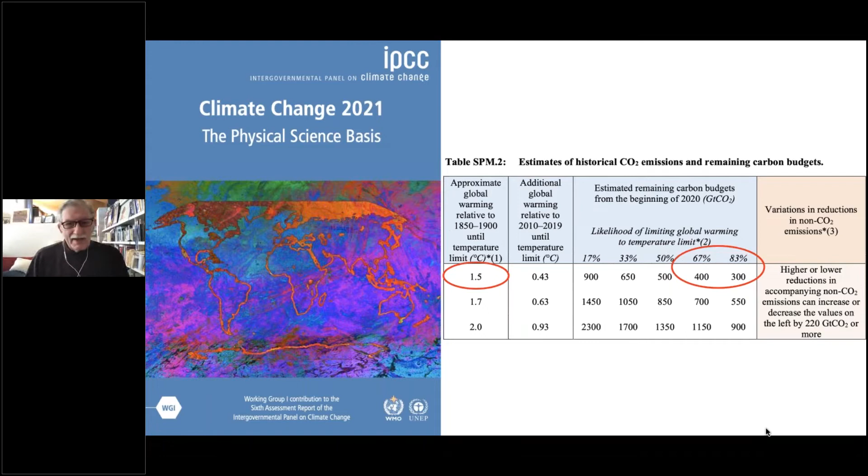So what does that mean? Well, roughly globally, we emit about 40 gigatons of CO2 a year. We hear everybody talking about they're going to phase out by 2050.

If we draw a straight line down from there, we'll do fairly well this year, but next year emissions are supposed to come back up. That's 600 gigatons. That's over the 300 to 400 gigatons, and that's less than a 50% chance of staying at the 1.5.

So what do we need to do? Well, we hear the scientific community telling us that we need a 50% reduction by the year 2030. And if we follow that line down, and actually do that, we will phase out CO2 emissions by the year 2050. That's 400 gigatons, which gives us a good probability of meeting the 1.5.

And for the building sector and the built environment, we can do better than that. We'd like to see a 65% reduction by 2030 and then zero out all CO2 emissions by the year 2040. This is the way we normally see how emissions are divided up.

Building operations, 27%, then you have industry, transportation. But what's new is that we now know that building construction and materials is responsible for another 10%, and infrastructure, all the site work and streets and roads and bridges, when we look at the built environment, is another 10%. So the built environment is responsible for close to 50% of all CO2 greenhouse gas emissions. So we have a huge role to play.

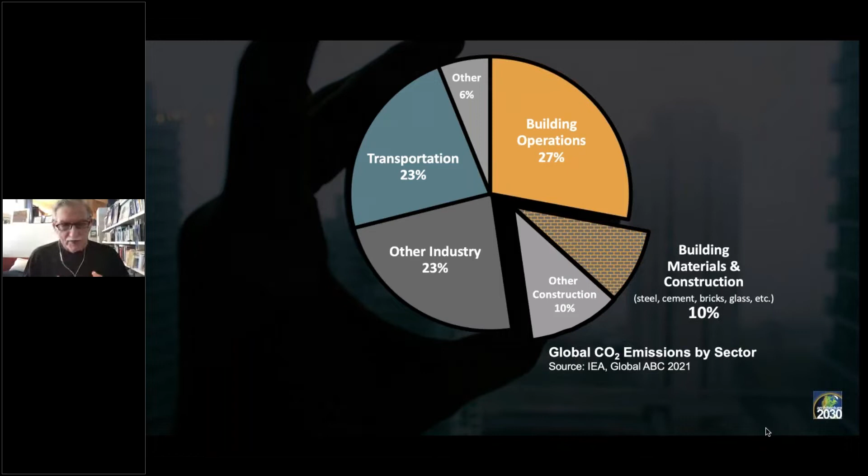So how did we go from late 1800s, pre-industrial times, through the Industrial Revolution to today? How did cities change, and how did we get all these modern skyscrapers, all glass buildings? The first modern building is the Bauhaus in Germany, built in 1925. Here you can see structure moves inside the building, columns and beams, rather than masonry walls in very short spans, so you could open up the floor plan. You could hang the exterior wall, it didn't have to be masonry, and get lots of glass and open up buildings. Considered the first modern building.

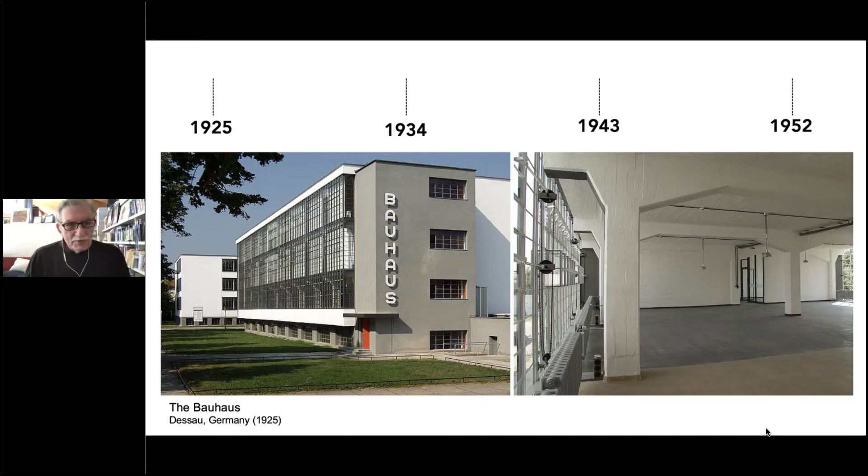So what was going on in 1925? Well, things were pretty primitive. We didn't even have TV then. We had the first Model T truck. We couldn't make transatlantic calls until 1927, the first one. So things were pretty primitive back when we had the first modern building.

In 1928, the leading architects, planners and designers in the world got together and held the first International Congress of Modern Architecture, to lay out new guiding principles, because at that time cities were really polluted. We were burning coal, housing was in with industry, and people were dying at a very early age. And so they laid out these beautiful modern principles: function-based zones, get the housing out of the industrial areas into high-rise housing blocks, into parks, solar exposure. Le Corbusier laid out the tenets of modern architecture: column wall separation, free the design of the facade, open floor plans, lots of glass. So that started in 1928, essentially a utopian movement.

It came to the United States in 1932. We called it the international style because we could import it and place these buildings anywhere, because energy was cheap and we could climate control any building. By '39, you see the beautiful Johnson Wax building, big open floor space. By '49, you had the glass house by Philip Johnson, a single glass house in a freezing, cold climate in New Canaan, Connecticut. We could overcome any exterior environment with fossil fuels and inexpensive energy. By '52, you had the beautiful single glass Lever House, and we had high-rise buildings. By '56, we had entire cities based on the modern principles.

So how long did that take? From the Bauhaus to the Lever House took 27 years. And we did all that with these tools, pretty primitive tools: T-square, triangle. We had to dip a pen into an inkwell. We didn't even get the first ink pen till 1960, and the first laptop till 1991. So we changed the world in 27 years with primitive tools.

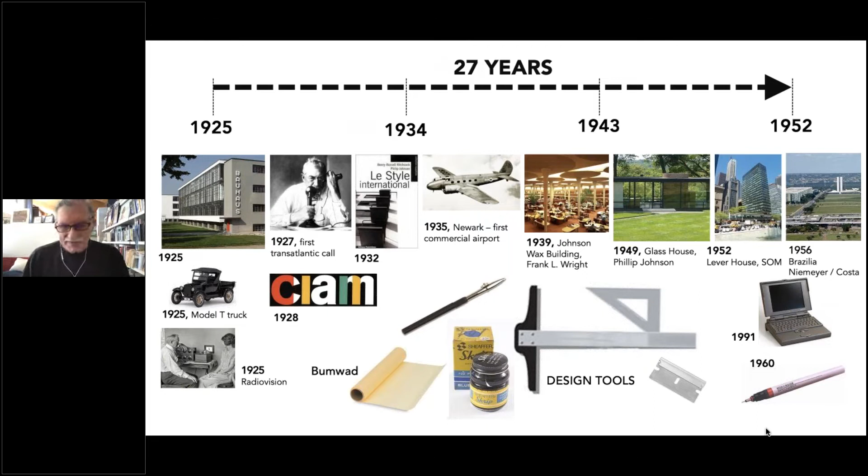It took years to do a set of construction documents to get something built. We now have 20 years to meet the 1.5 degrees C target, and we need very, very quick reductions between now and 2030. So at COP26, we're asking everyone and all countries to commit to a 50 to 65% reduction by 2030, which will put us on track for zero by 2040.

And this has been signed and pledges made by all the major architecture, planning, landscape architecture and engineering organizations in the world, representing over 1 million design professionals and 60 of the major international largest firms in the world, responsible for over 300 billion in annual construction, also calling for the 50 to 65% and pledging to help countries meet these targets.

So what are the planning and guiding principles we need to set out to do this? Design all new buildings, developments and major renovations zero carbon: efficient building operations, electrify them, and bring in renewables for the electrification. Use low embodied carbon and carbon sequestering bio-based materials and landscapes, and then densify, repurpose, reuse, or renovate existing buildings and neighborhoods. Rather than tear them down, the greenest building is the one we save and renovate, because we don't have to redo all that structure.

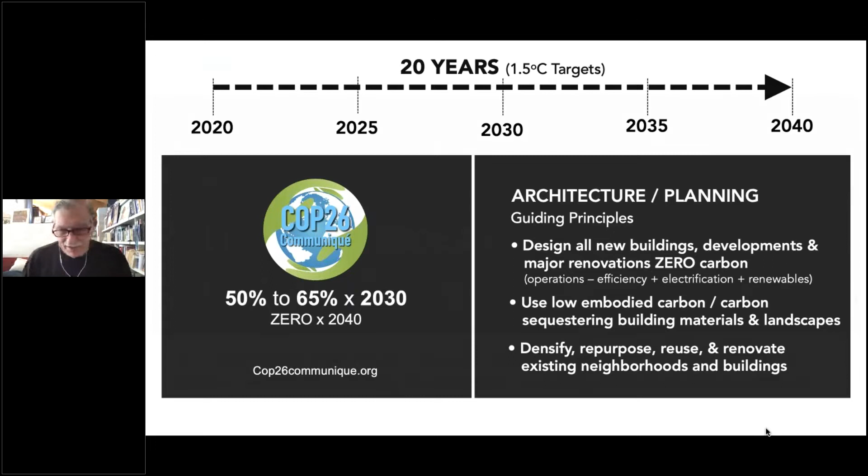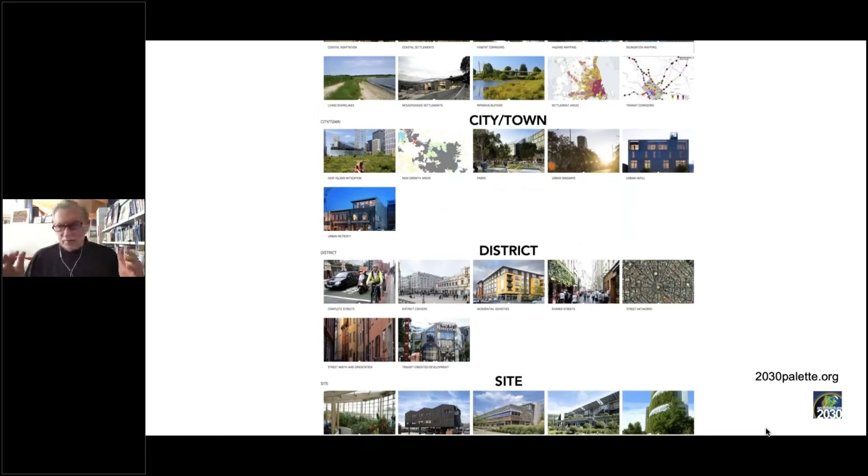Solar is now the cheapest electricity in history. We have the tools to do it, incredible tools now. And all the principles are laid out in the 2030 Palette. You can get it at 2030palette.org, everything from regions, cities, towns, districts, what to do. These are all the recommendations for how to design zero carbon buildings.

And how are we doing?

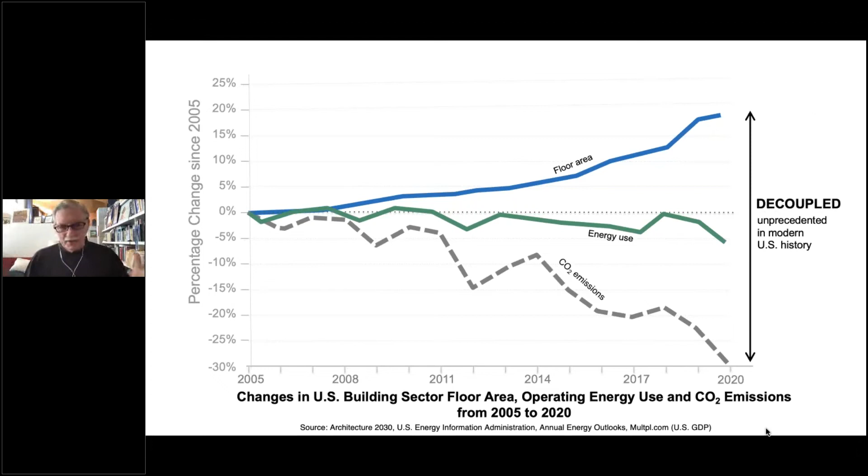In the United States, something very interesting happened in 2005. Floor area increased - it's been increasing since the Industrial Revolution. Energy consumption and emissions always increase when you keep building and building floor area, but something happened in 2005. All of a sudden, energy consumption in the entire US building sector did not increase. It actually went down 5.2%. And look at the drop in emissions, went down 30% between 2005 and 2020. This decoupling of emissions from floor area, even though we built over 50 billion square feet, is unprecedented in US history. So it shows we can reduce emissions and also build.

So what we're projecting is right now we're at a 30% reduction. If we make good on a zero grid by 2035, which our administration wants to do, we should be at 72% below 2005 levels by 2030 and easily phase out emissions by 2040.

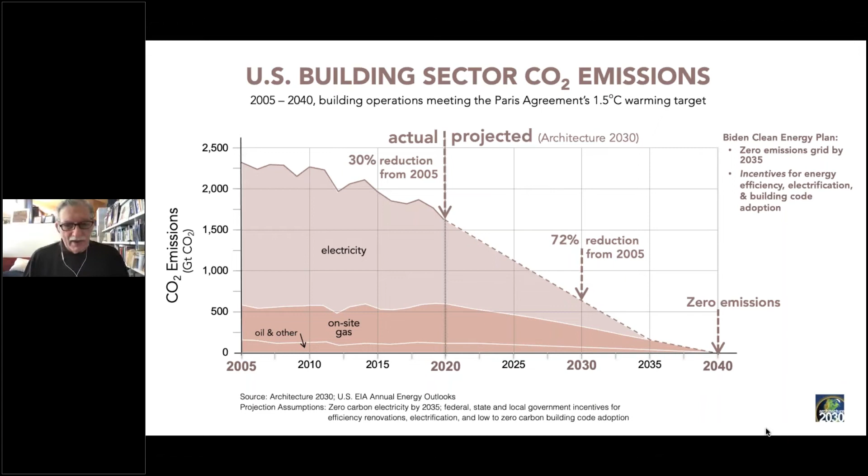So how are we doing globally? Well, worldwide, we're building. We went up 22% since 2010, huge amount of building worldwide, and we're going to keep on building. Those are the projections, but we have to build right.

So what's happening with energy use? Well, energy use didn't go up as much. It's really interesting, we're starting to see a little decoupling. It flattened out in 2018, and because of COVID, it went down slightly, 1% in 2019 to 2020. So we're starting to see that, but look what's happened to CO2 emissions. This past year in 2020, it just dropped almost off the map. It's amazing it went down so much.

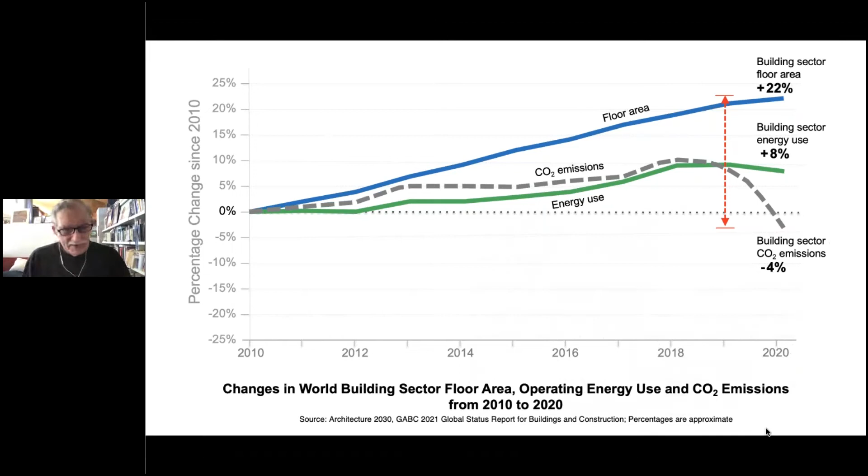And that happened because of renewables. And we're starting to see now that same decoupling that happened in the US over the past 15 years, we're beginning to see that globally. And that's the good news. The reason we had that drop this past year was in 2020, renewable power was the only energy source for which demand increased while consumption of all other fuels declined. That was the International Energy Agency.

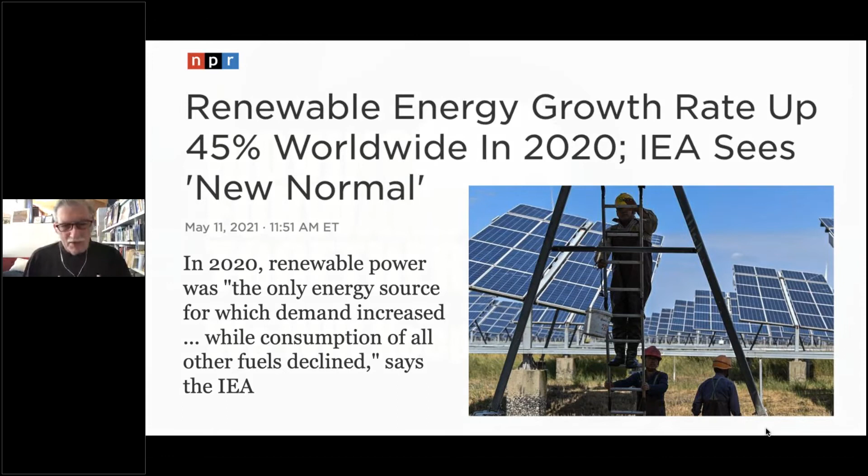So can we keep 1.5 degrees C alive? If we do our part in the building sector and the built environment, we definitely will keep the 1.5 degrees C alive. Thank you very much.

Thank you, Ed, very much. I always love to listen to that, and I like the positive note, especially the comparison with the tools. When you show that, it is really insane what we were doing in 27 years. And now, like you said, at the COP, we have now the big festival of pledges again - everyone is pledging to do something eventually. So I think the key part is it's possible. We have the tools, but we have to get going. And I think this is exactly where the architects and engineers play a very crucial role. They have to fight for that with their clients, and they have to make these connections. So thank you very much for giving that intro and making the time. I know you're very busy, but I already have some ideas, so I will reach out to you after this webinar.

And now I'd like to ask Bruno Sauer to join us on that virtual stage. There he is, live from Valencia. And Bruno, maybe I and Ed, maybe the three of us can announce this year's winner, and then Bruno will talk or explain a little bit about her.

I was very happy that she decided to apply for our award, especially because Bruno and I, we have been - before the pandemic, I mean there's now the time before the pandemic and during the pandemic. Before, we were in India to do a Building Sense Now workshop, and we did it in a very special place in Auroville. I don't know from the audience who has been there - it is a very special place. I don't know, Ed, why you didn't join us, but we have to go there again. It's mandatory. It's a very, very hot location. I think it's like the hottest location in India, and we were spending 2 days in a building without air conditioning, and it was possible. It was a low-tech building. It's a community, Auroville, where I think the quality of the building and the understanding on how can we build in such a climate zone is a big part. And our winner has been working there. I think she will maybe show us something later as well.

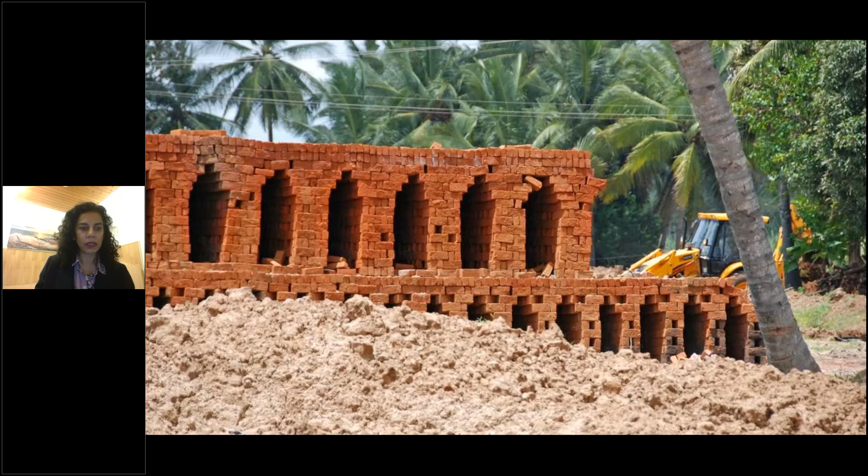And I will just walk you through what this involves. So typically, now let me see how to share my screen. Just give me a moment. I don't know why it's not moving. I'm not able to move my screen. I'm sorry, you should on your computer. Can you not, if you just maybe click on the, yeah, now it does. It moved, right? Yeah, now it moved.

So typical brick kilns in olden days, like pre-industrial bricks, were fired in kilns made out of the stack of bricks themselves. So all over Africa, India, everywhere, before the Hoffmann kiln and other types of kilns were created to make bricks industrially, this is how bricks used to be made. It's just a pile of bricks, and the bricks on the inside cook more and the bricks on the outside are colder, but there are areas for the heat to travel, and wood is fed inside each of the openings. Then the whole brick kiln, which is the stack itself, all gets cooked, and the outer bricks, which are not so well cooked, typically get used in areas where you need less waterproofing, or they are fired again in the next round.

So in India, many areas like Pondicherry have very high rainfall, and it's difficult to build earth construction because earth is vulnerable to water. So this is a technology that can allow the use of ceramic bricks, same material that is waterproof and water resistant as bricks, but not requiring any cement, because the whole structure becomes like a brick.

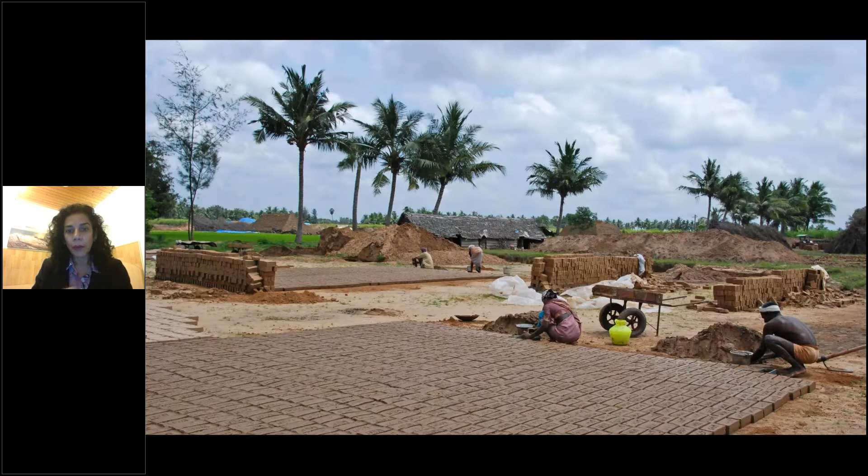Now, why am I starting with the kiln? Because already there is local knowledge to build bricks in an area where, if it is not industrial, what happens is after the monsoon, the clay always collects in specific low-lying lands, and that kind of clay is usually ideal not for rammed earth or other forms of earth construction, but best suited for making burnt bricks. So this is a very typical landscape you see of a local economy of brick making, which is a non-industrial method of making bricks according to how much clay there is, and it is done every season. The same people do other things during the season - they are probably doing agriculture, and they grow the fuel for baking the bricks and so on. So this technology builds upon an existing local economy, and the idea is to strengthen that local economy. So that is one reason to base this kind of technology.

The second thing is that normally when you bake bricks in the industrial oven, you need about 980 degrees centigrade. The kiln absorbs about 40% of the heat you generate, so every time you do a firing, straight away you lose 40% of the energy into the wall of the kiln itself in industrial kilns. Now, this is a technology where the house is a kiln and you cook other bricks inside it, and with the heat you would have otherwise wasted, we trap that heat and direct it to cook the wall of the kiln itself. So inside the house is like an oven, and you fill other ceramic products inside, and then the energy that would have otherwise been lost is directed, so with the cost of a mud house you get a brick house for the outer walls.

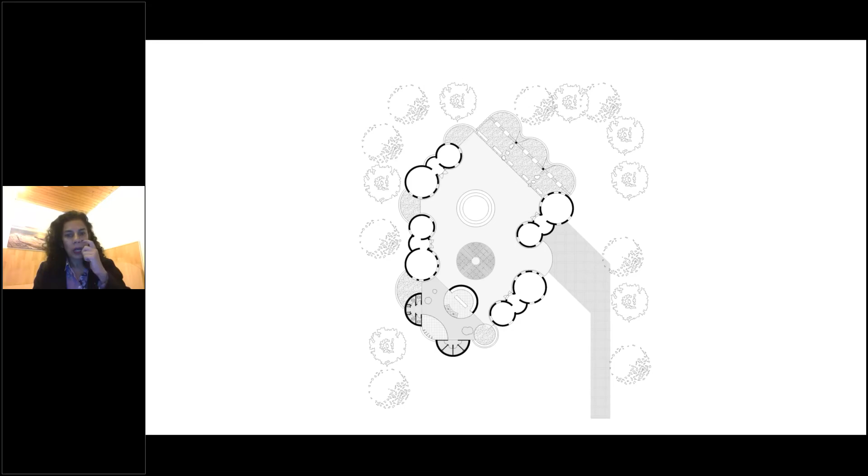What we did is, in such a technology, you have to anyway first build a mud house from bricks, locally made bricks. There are many students here from different schools who joined us in this workshop to build this technology. If you observe the way the plinth is, you have one layer of baked bricks, and there are little holes through which oxygen can enter during the cooking process. Then there are bigger holes on top from where the firewood can be placed, just enough to start the fire. Now, in Ray Meeker's past buildings, most structures were built with firewood, just like local people make their bricks, in the same technology.

In this case, what we did is use even less embodied energy, because we took coal dust from factories where there is coal powder residue, which has some calorific value. We mix 5% of coal powder into the clay, and made bricks out of that. So when we start the fire, we need very little wood to start it, and after that the brick burns from its own fuel by contact.

Also for the form work for the windows etc, we have used anything from waste materials like old bicycle wheels and so on, or we have used pots or whatever we had to make these circular openings for windows. So we tried to buy nearly nothing.

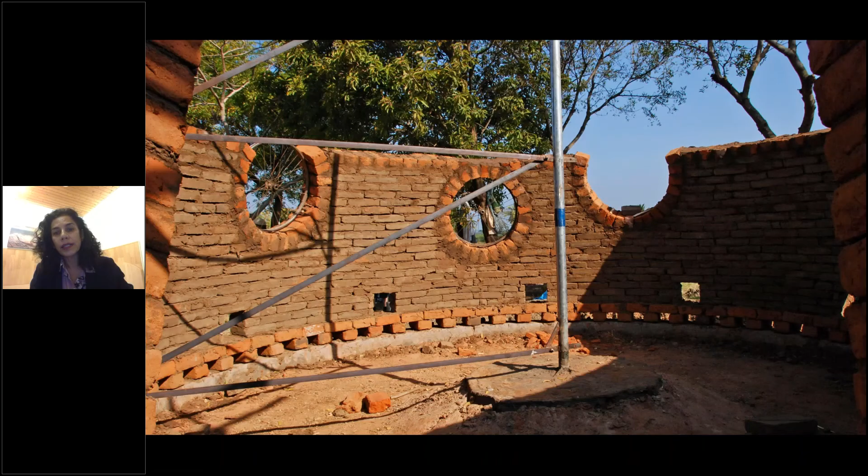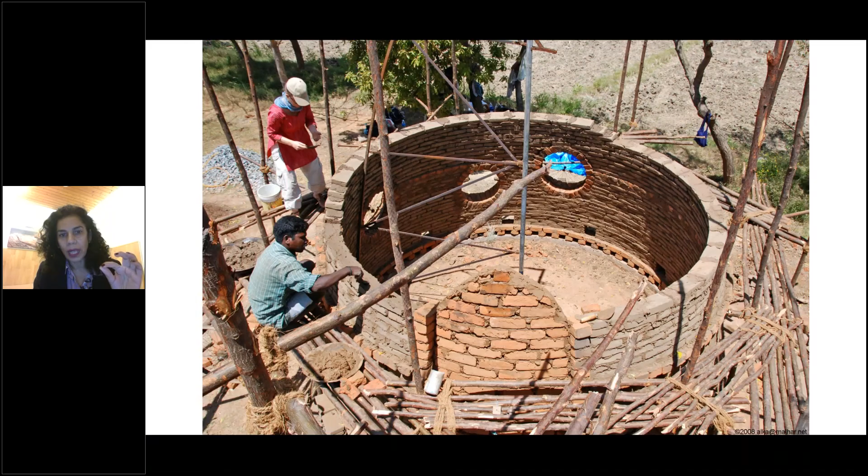So this is how the earth construction is going on here, as you see, with a simple frame that you rotate and build everything with clay and clay mortar. And afterwards, when the whole construction is over, it has to be protected so the structure doesn't become wet, because it's only clay.

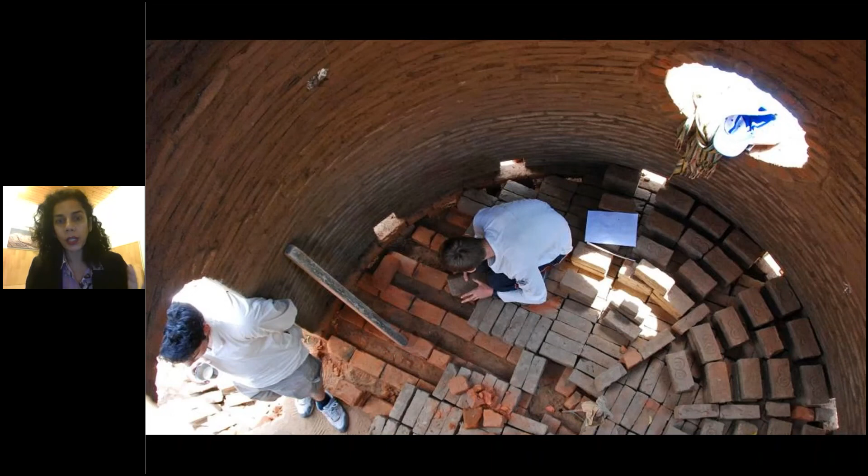So you have to make sure that it doesn't rain, and you have to pack it in case it does. That is a very important and boring part of the work, but it has to be planned because the structure is very vulnerable to water.

Once the building is ready, now the kiln, the oven is ready. The house is the oven, right? So first the house has to function as an oven. Inside this house, we have started stacking the bricks in such a way that you will see in the lowest layer there is oxygen coming in, like a grilling platform on which the bricks are stacked.

From the fire boxes, which are open on the wall, there is a little place to start the fire with wood, and then all the above layers are just brick. There is a little bit of coal dust in the bottom layer just to start the fire so it doesn't go off. Afterwards, all the rest of the bricks fire from their own embodied coal content inside it, only 5% of that powder.

Then the structure is sealed with mortar, just mud plaster, everything is closed, and the fire is lit. It cooks for 3 or 4 days until the whole brick is cooked. In the former experiments of Ray Meeker, the brick wall was not getting fully cooked because it's very difficult for the heat to penetrate the outer wall up to 980 degrees. Maybe the outer wall is only 400 or 500.

So he found out and made a breakthrough by applying a combustible plaster layer of rice husk and some fuel, some kind of cow dung or bio material that can catch fire. By the time the outer wall reaches 400 or 500 degrees, the outer insulation layer catches fire, so in the last stage it gives a lot more heat and the wall cooks through. This was how Ray Meeker solved the cooking of large clay structures to make the heat penetrate throughout.

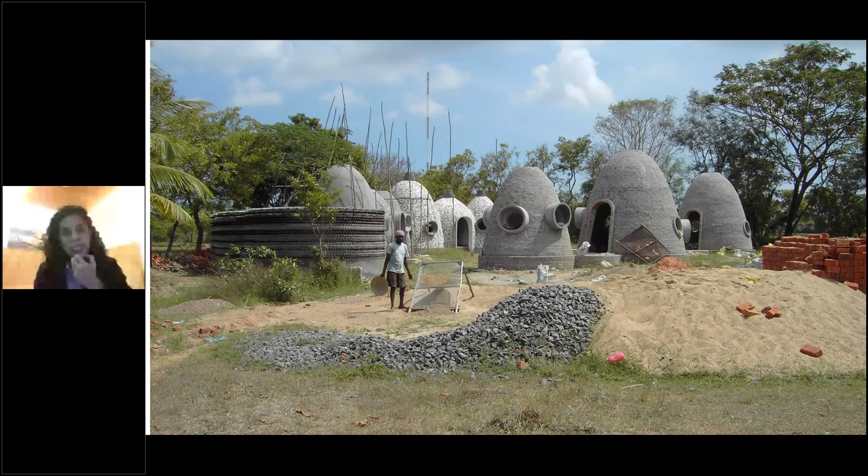This is a research project, so we were studying how the fire moved, where did the bricks cook well, where did it cook not so well. And then finally at the end we made the toilet block, in the foreground, made out of waste bottles, and we completed the surface, because glass is the same vitrified product like clay, it's like sand which gets converted with heat, so we use the same technique.

And also on top of the domes, to allow light and ventilation, we have used broken chai cups to finish this masonry. It's an idea to also use circular materiality strategies - we recycled bicycle wheels. There are many other elements. We try to not buy any materials, taking everything either from the local soil or from urban waste.

It's a project with very little resources. So here you see we have used terracotta pots and chicken mesh for connecting domes, to make elements with very little steel - the mesh that farmers always have access to. There was a lot of research here, and these terracotta pots have been kept as storage for the children to keep their special toys, like little cubby spaces for individual storage, according to the height of the children.

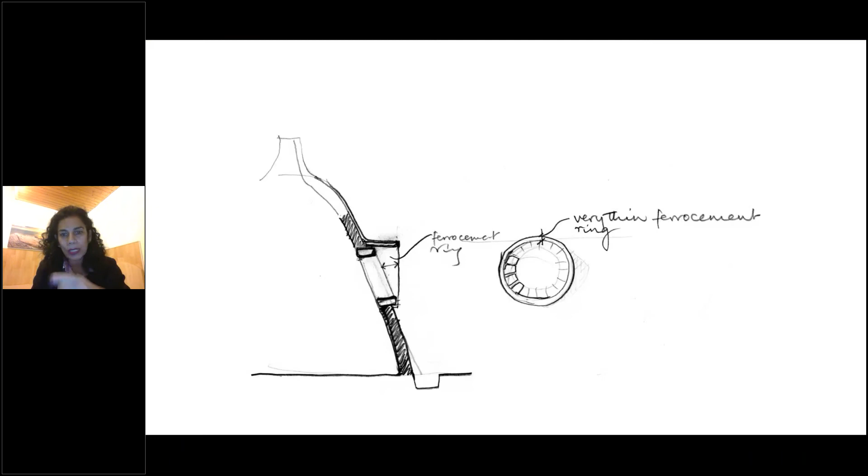But more than the fact that this is not a mainstream technology, what I wanted to do through this project - besides a PhD that I have done on the same topic, building with fire - is stress the importance of creating space and time for experimentation.

And I want to really thank you all for noticing that even though these are not photogenic, typical architecture projects, this has a very rich process, a lot of scientific thinking about material sciences, about social aspects involving people in their construction. Because with a project that has no resources to build with, you realize that when you go to places where people don't have any resources or surplus money to make architecture with, you realize that when you feel you have nothing, you still have something - you have your life, your time, and there's always some material lying around you. So instead of focusing on shortage, you can focus on what is abundant.